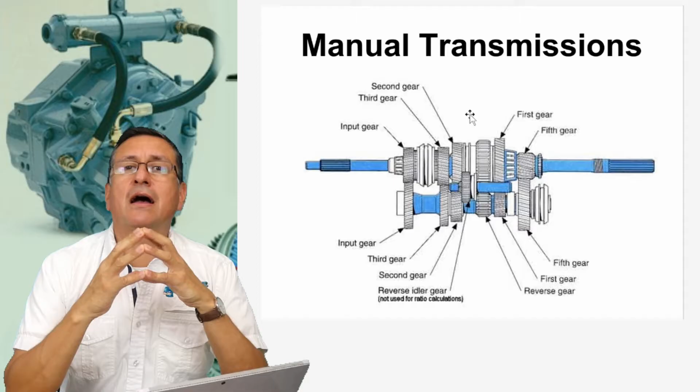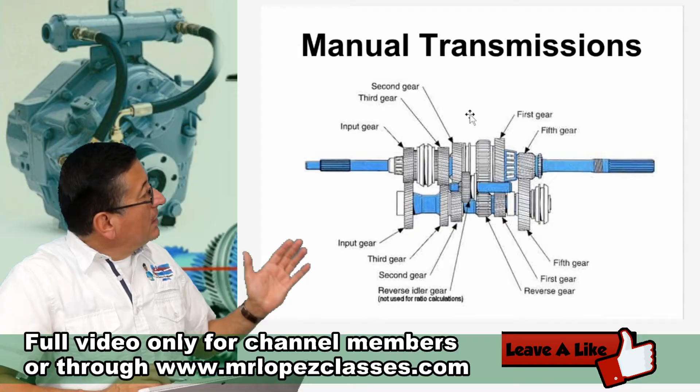The manual automotive transmission doesn't have an oil pump dedicated to circulate the oil internally into the gears and the shafts. The oil in the transmission - suppose this is the transmission - we are going to refresh quickly in this wonderful picture, the marine transmission.

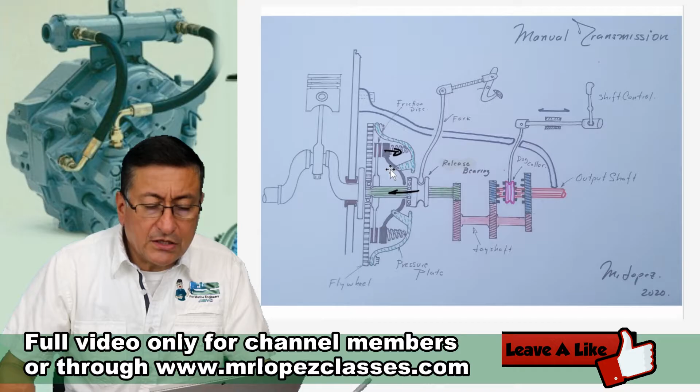In other words, this shaft, the input shaft, the green shaft, is isolated with this clutch. When the clutch is pressured, this element goes out, and the friction disc over there is free. In that moment, that shaft, the green shaft, is free.

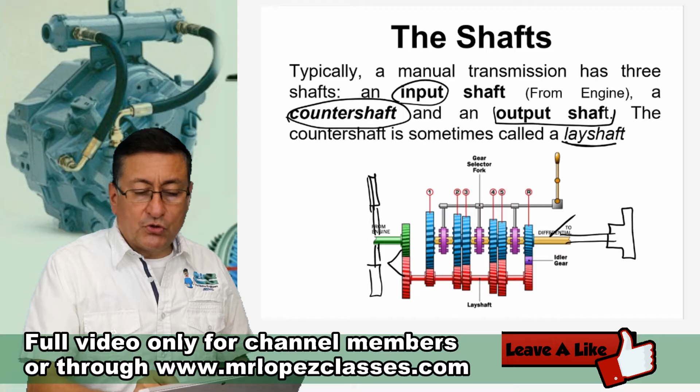In that moment, because this shaft is free, that shaft, the counter shaft or layshaft, is permanently connected with the input shaft. In other words, this gear, the green gear, and that gear, the red one, are in permanent contact. We have three shafts: input shaft, counter shaft or layshaft, and output shaft. The output shaft in this particular case is the yellow one, the input shaft is the green, and the layshaft is the red one.

The layshaft or counter shaft is in permanent contact with the input shaft. It's spinning at the same speed as the input shaft.

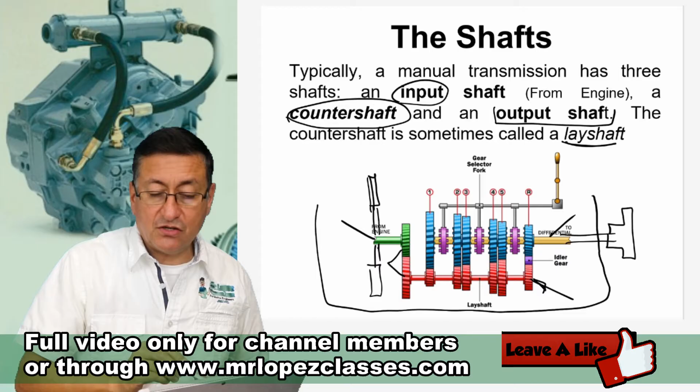Remember one thing: if this is the case of the transmission, we have oil at this level. In other words, when the gears are spinning, by splash the oil lubricates the rest of the gears. This particular transmission, the manual transmission, doesn't have a dedicated oil pump.

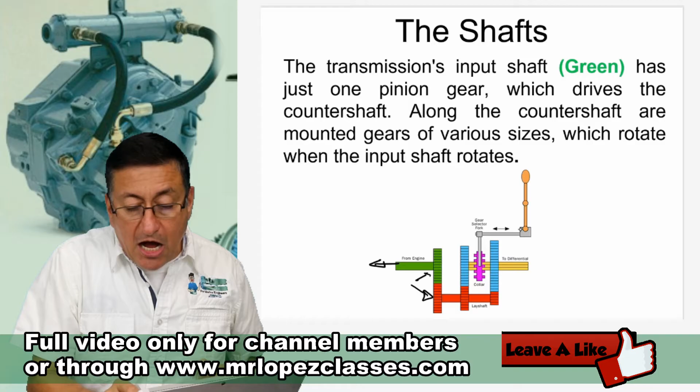On the gears of the layshaft, you have in permanent contact the blue gears. Those blue gears are in permanent contact with the red one, and those blue gears are spinning free all the time. If you check the output shaft, this is the output shaft, the yellow one, it has splines.

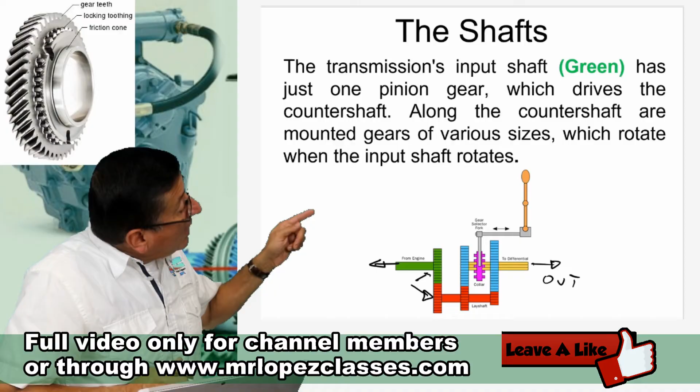However, the blue gears have bushings, copper bushings, and those copper bushings help with the free movement of the blue gears into the shaft, into the output shaft. In other words, those gears are free. Those blue gears engage with the yellow one only when the collar is moved.

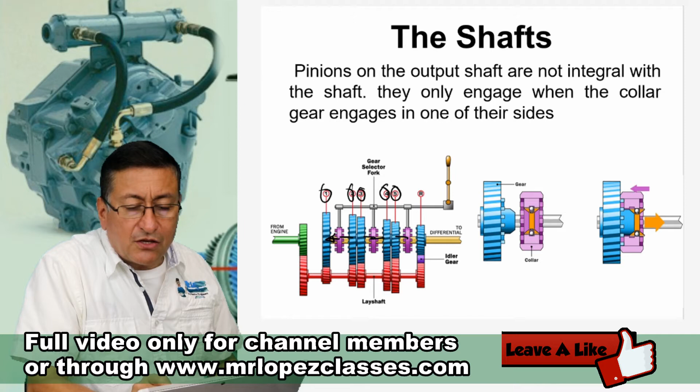Or this one, the last one here, the fifth gear. Or if the last one engages with this, and this one has a gear in between both of them, you engage reverse. That's simple - this is the manual transmission.

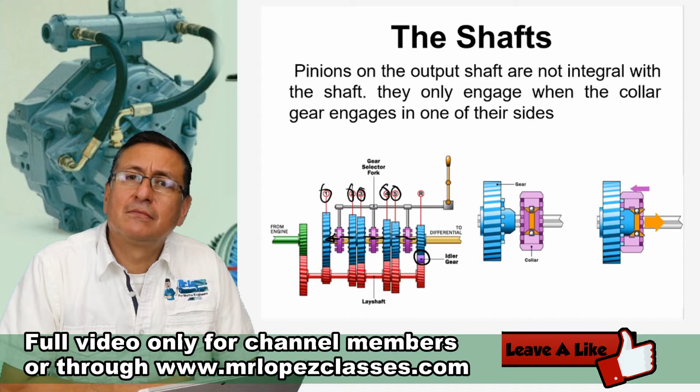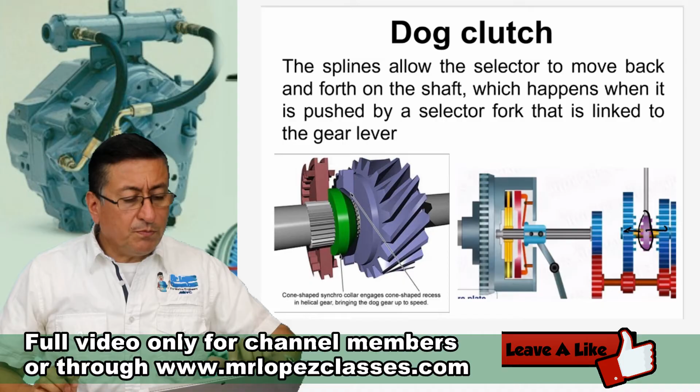This is the dog collar, and this is the dog collar, and the dog collar engages laterally here or here in order to help with the movement of the gears. This is possible basically because on each side of the dog collar there are copper synchronizers.

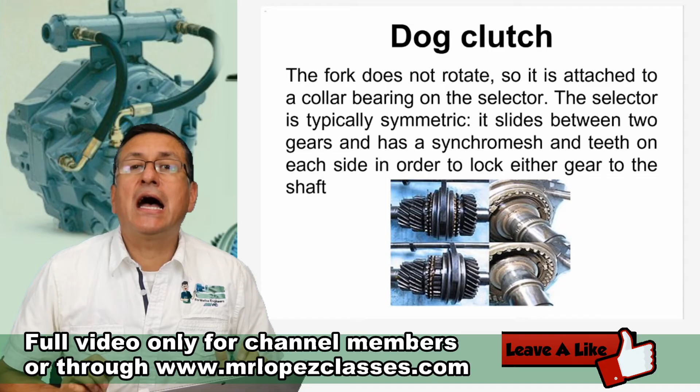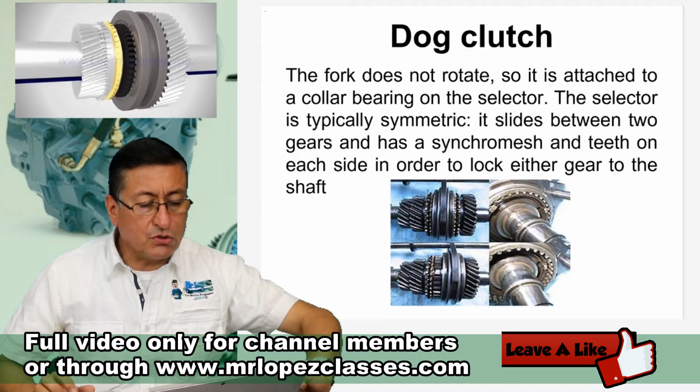Those synchronizers have teeth like a cone, triangles that help with the movement. Those triangle cones are the synchronizers. The new dog clutch in typical gas or diesel engines has a synchronizer mechanism, or synchromesh. It consists basically of a cone clutch that helps with the movement of the collar into the gear. And this is the situation.

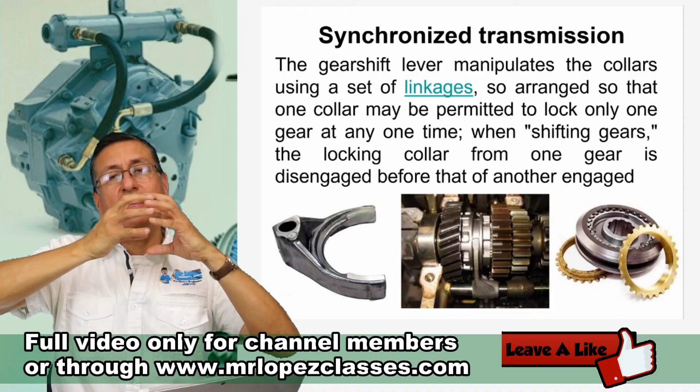The gear lever manipulates the collars using a set of linkages and helps introduce the collar into the lateral side of the gear by means of the synchronizer.

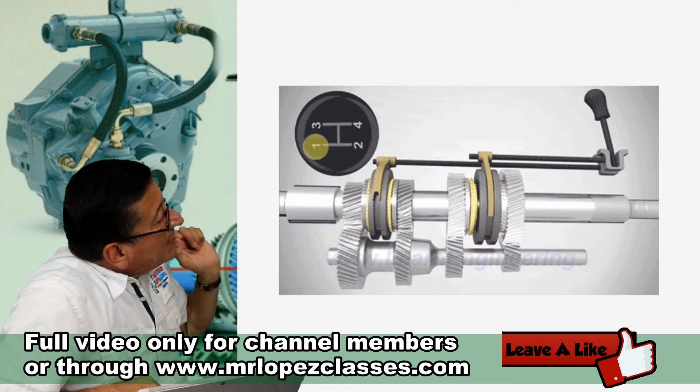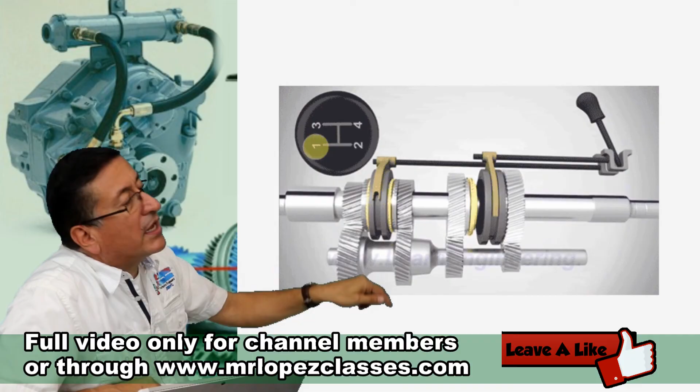In this video I have a good example of how the synchronizers help with the movement of the collar, exactly like this. You can see how the collar moves and is basically aligned with the copper of the synchronizers, and enters when the gears are moving by inertia, because at that moment the transmission is supposed to be in neutral. In other words, those gears are spinning basically because of the momentum of those gears, making it easy to introduce one gear into the other because it's not producing torque.